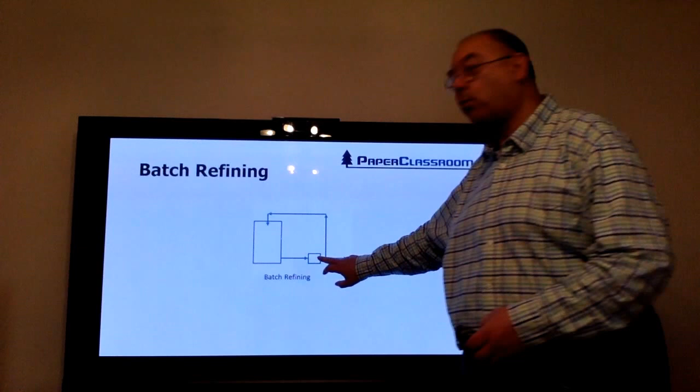Today we're talking about refining strategies. This is the simplest of all refining strategies. We have a chest of stock, we have one refiner, and we keep recirculating the refined stock through the chest until we get the Schopper value that we want.

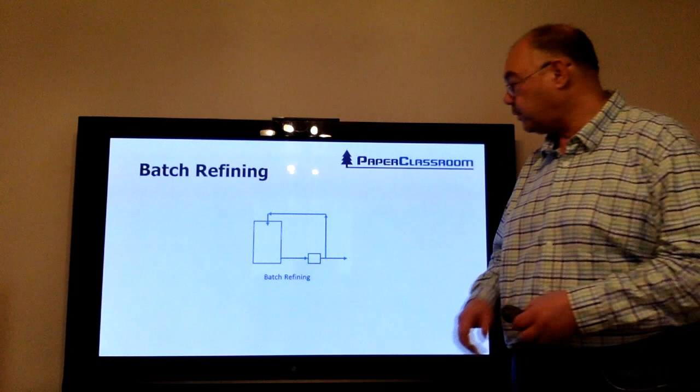It's not the best way of doing refining because you never know whether one fibre goes through 10 times and other fibres never go through at all, or whether they all go through the same number of times. The reason why people use this is usually just to save on capital investment. You only need one refiner rather than ideally having 3 refiners, which you'll see on the next slide.

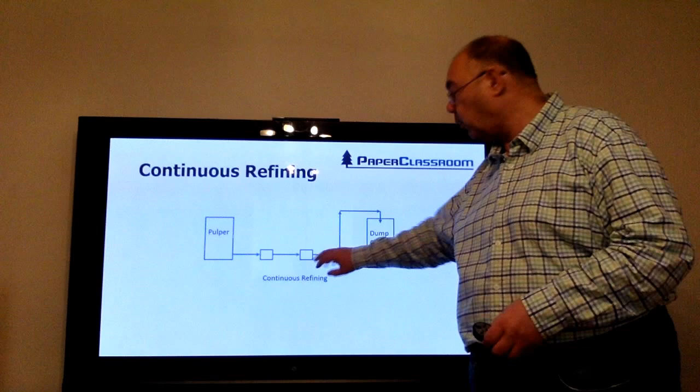So you go through the first refiner and do some work, you go through the second refiner and do some more work. You don't want to do it all on one refiner, it's too harsh, and then store the stock. So continuous refining is much better than batch refining.

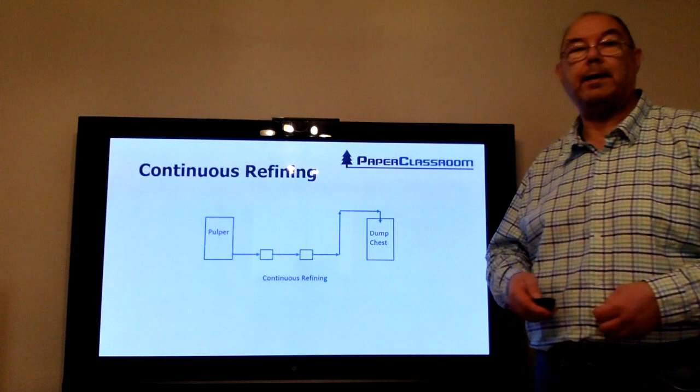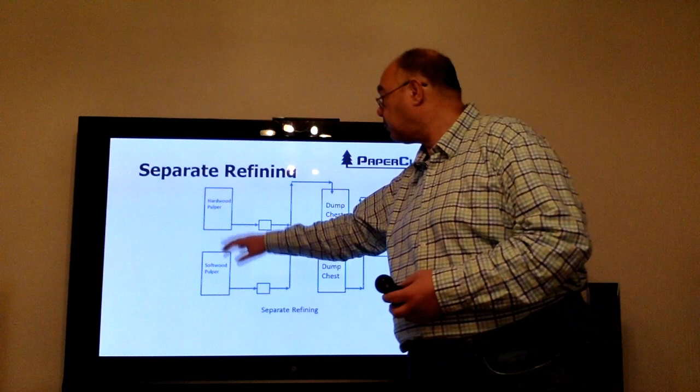If you're dealing with more than one fibre, then what we need is 2 systems. One system example here, say you've got some hardwood pulp and some softwood pulp. The ideal way is to put the hardwood pulp through a series of refiners, put the softwood pulp through a series of refiners, store the refined fibre in dump chests, and then mix them as you need them.

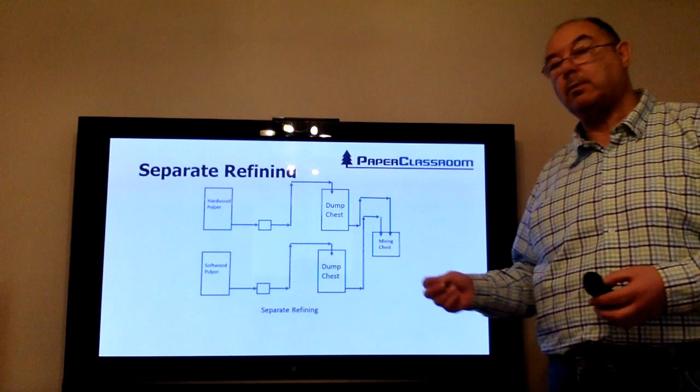This allows you to get optimum refining. You can refine the hardwood fibre to its optimum value, you can refine the softwood fibre to its optimum value, and then you've got an optimum furnish.

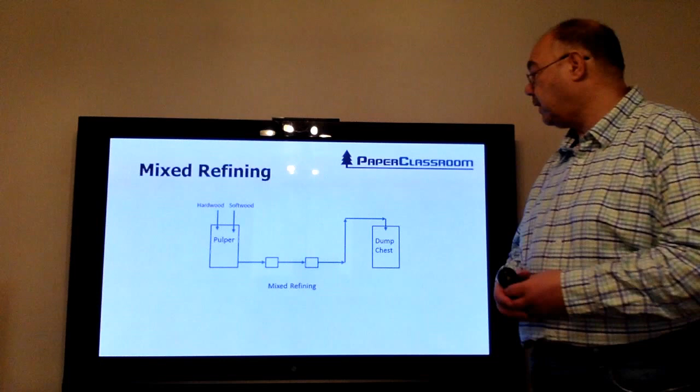Again, what people do to save money, to reduce the number of chests and to reduce the number of pumps, is to do mixed refining. So here, they put hardwood and softwood together in one chest. If you're lucky, they might put it through a series of refiners, so for continuous refining, and there we've got the product.

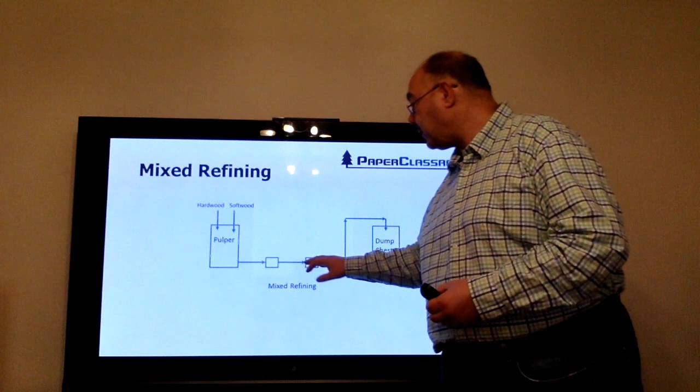The problem with this is if you've got some fairly soft fibres, then the refiners will act on the soft fibres rather than act on the hard fibres. Therefore, the softer fibres will be over-refined and the hardwood fibres will be under-refined to get the sort of Schopper-Riegler value or Canadian freeness value that you want.

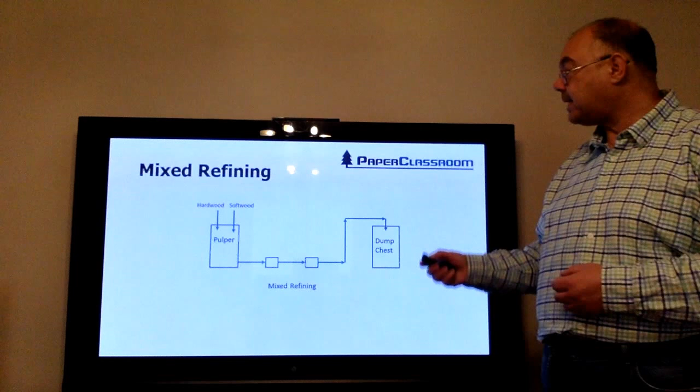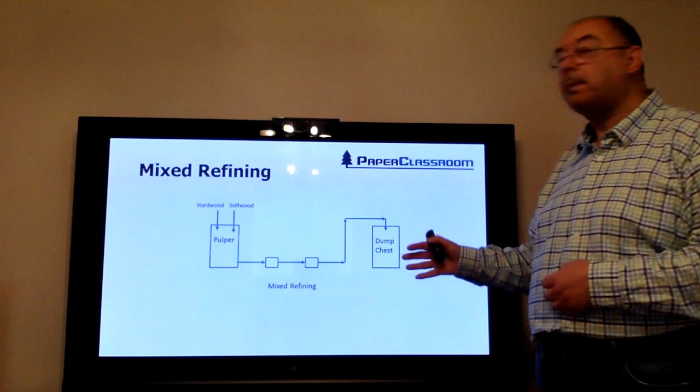So the furnish that you get by doing it this method is entirely different from the furnish you get by doing it by this method. And you do not optimise the properties. In fact, it's exactly the opposite. But some people do it to save capital expenditure.

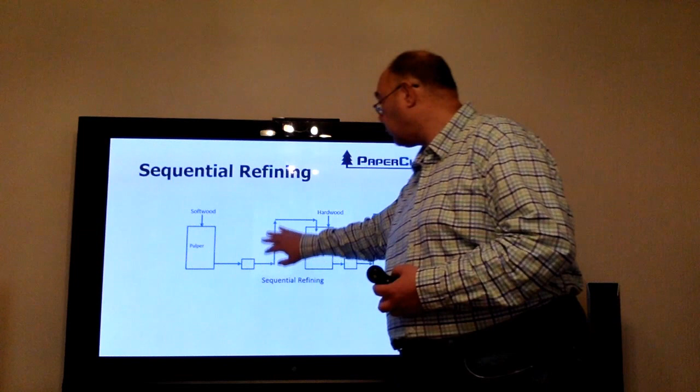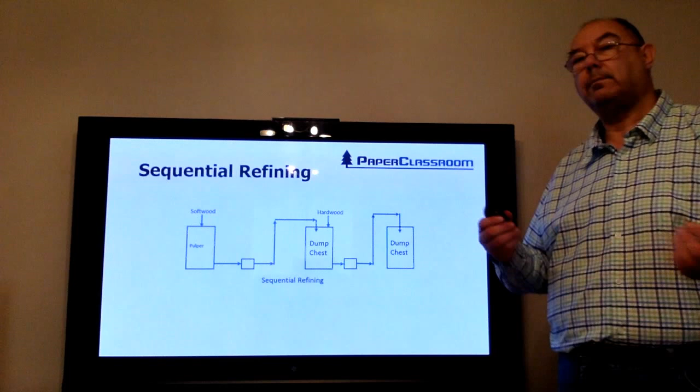Another way of doing it is sequential refining. So softwood fibres, do some refining on that first of all, put it in a storage chest or a dump chest, add some hardwood fibre, and then do the second set of refining. Not as good, but better than the combined refining.

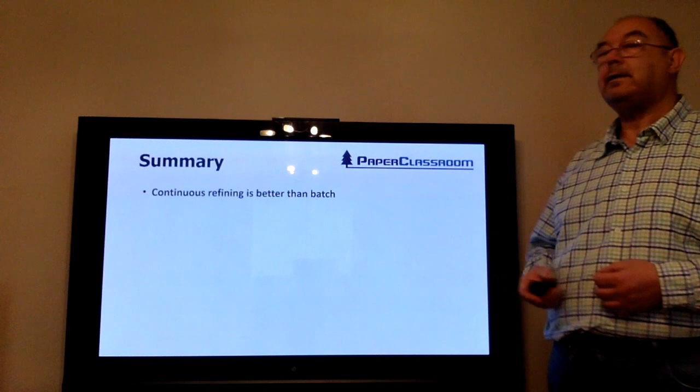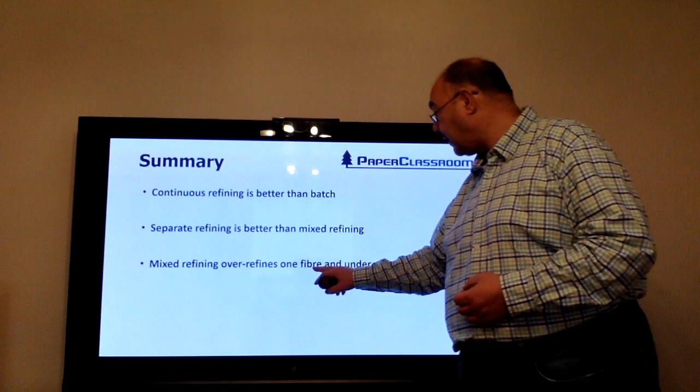So a summary of what we've talked about in this session. Continuous refining is better than batch refining. Separate refining is better than mixed refining. Mixed refining over-refines one fibre and under-refines the other fibre.